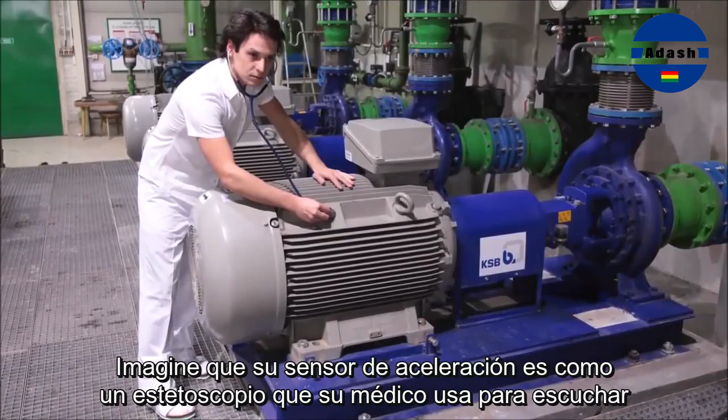So what is an acceleration sensor and how does it work? Imagine that your acceleration sensor is like a stethoscope which your doctor uses to listen to your heart. It is basically able to monitor the vibration signal from the machine and show you the values of these vibrations on your vibration meter or analyzer.

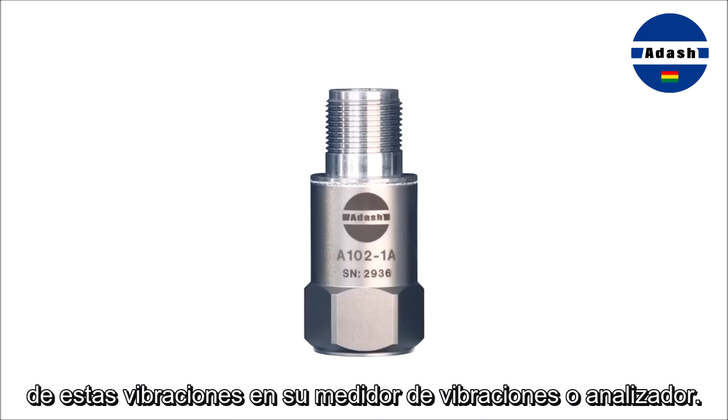The most commonly used acceleration sensor in industry is a piezoelectric acceleration sensor. It is an electronic device which, in a very simple way, looks like this inside, and like this in reality.

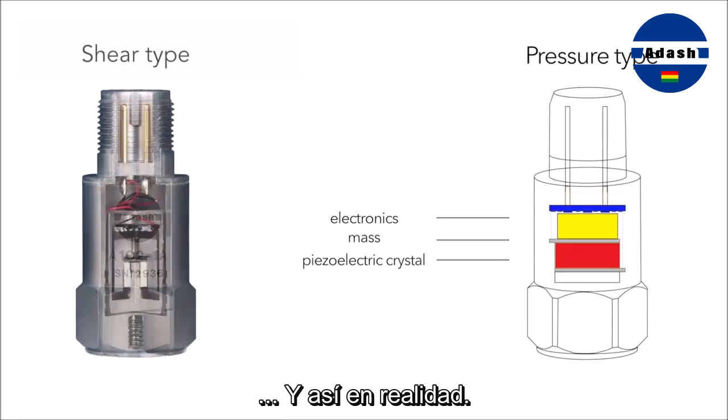A piezoelectric crystal generates an electric charge when it is deformed, meaning compressed or stretched. To ensure deformation of the piezoelectric crystal, you can see that there is some preloaded mass on it. The electric charge is transferred into the electronics of the sensor, where the electric charge is converted to voltage.

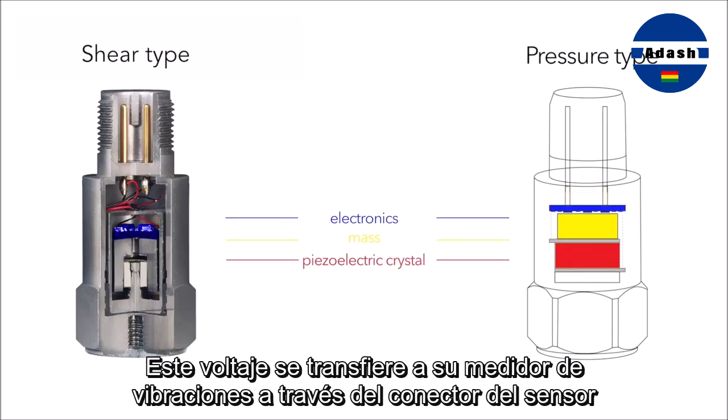This voltage is then transferred into your vibration meter through the sensor connector and cable. In other words, the sensor is shaking on the running machine. The preloaded mass is deforming the piezoelectric crystal, and this generates a voltage signal on the output of the sensor.

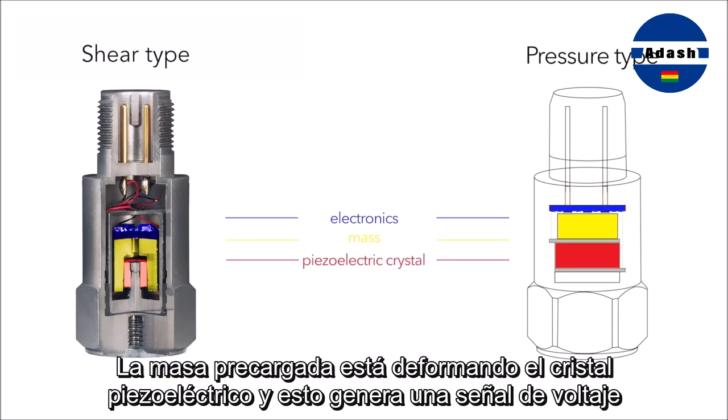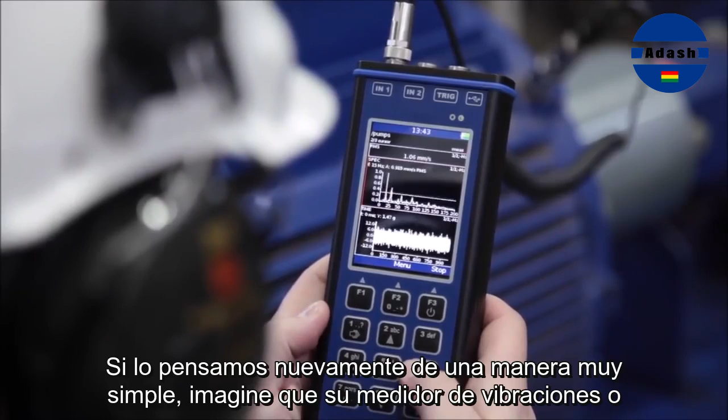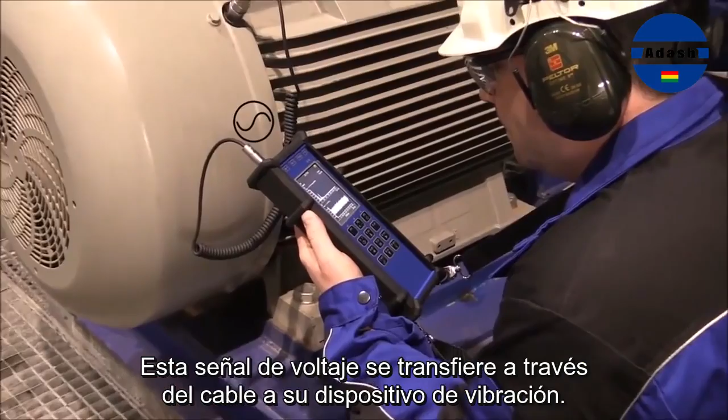A vibration meter or analyzer is an electronic device which is able to process vibration signals. If we think about it again in a very simple way, imagine that your vibration meter or analyzer is a voltmeter. The sensor is generating a voltage signal while it is shaking on the machine. This voltage signal is transferred through the cable to your vibration device.

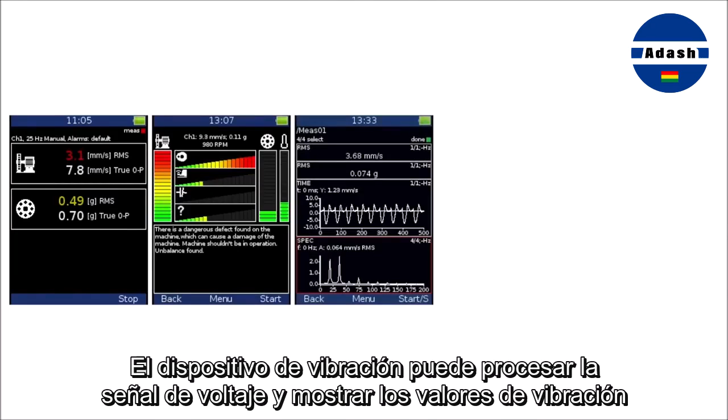But your vibration device will not show you volts. It is smarter than that voltmeter. The vibration device is able to process the voltage signal and display vibration values such as acceleration and velocity. We will describe vibration values in our next video.

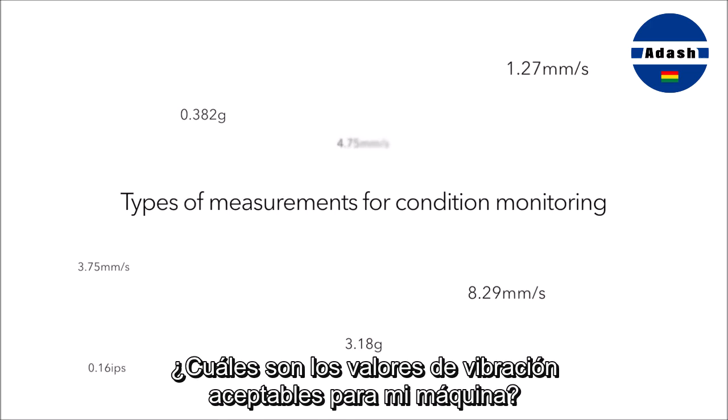The most common question about measurements is, what should I start to measure and what do these numbers tell me? Is it a good number or a bad number? What are acceptable vibration values for my machine? What are the limit vibration values which my machine should not exceed?

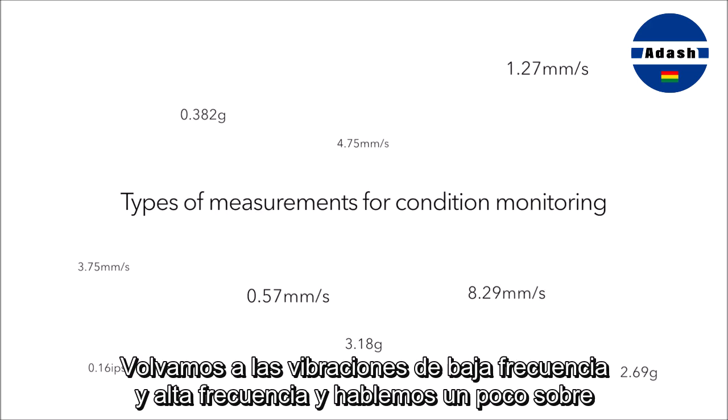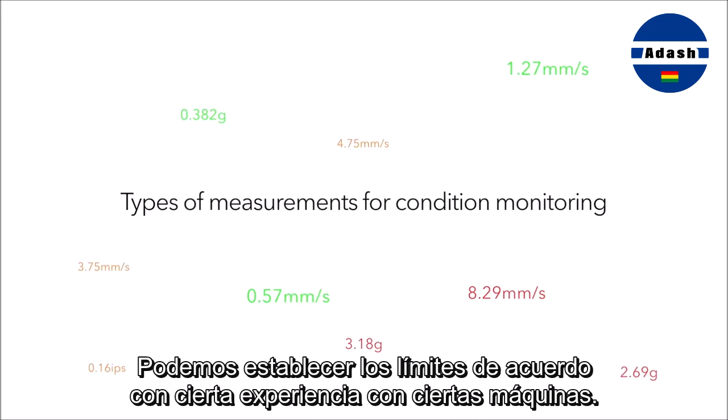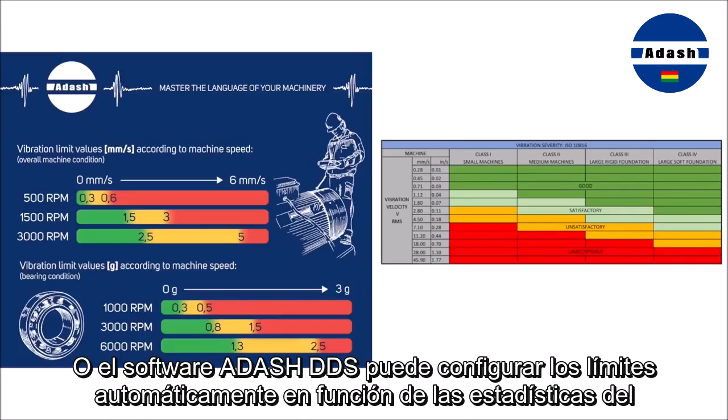Let's go back to low frequency and high frequency vibrations and talk a bit about vibration limits. There are some limit vibration values which can be considered as values indicating a worsening machine condition. We can set up the limits according to some experience with certain machines. There are also, for example, Adash and ISO 10816 standards for those limit values. Or the Adash DDS software can set up the limits automatically based on statistics from the previous measurements.

All mechanical faults which are related to the speed of the machine, such as unbalance, misalignment and mechanical looseness, are considered to be low-frequency vibrations. These vibrations are measured as velocity in millimeters per second or inches per second.

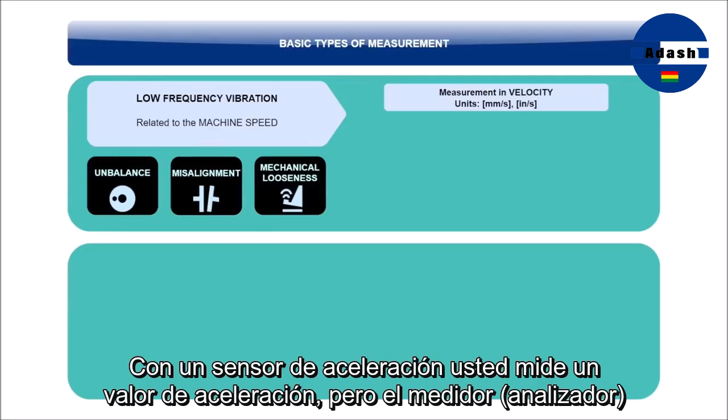Maybe you are asking now how you can measure velocity with an acceleration sensor. With an acceleration sensor, you can measure an acceleration value, but the meter, the analyzer, can convert the value to the velocity value. The most common frequency range of this measurement is 10 to 1000 Hz.

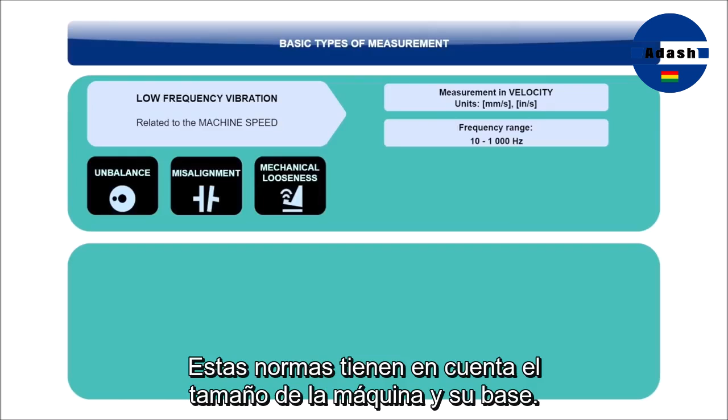This frequency range is also applied on ISO 10816 standards. These standards take into account the size of the machine and its foundation. Adash has defined vibration limit values which are related to the speed of the machine, not to the size of the machine. The frequency of 10 to 1000 Hz is also applied.

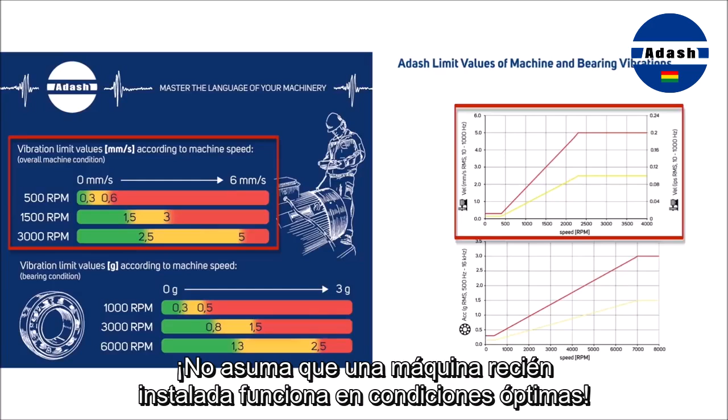Do not assume that a newly installed machine runs under its optimal condition. What if it was badly installed? It could be misaligned or unbalanced right from the beginning, as we described in Vibration Diagnostics for Beginners, Part 1.

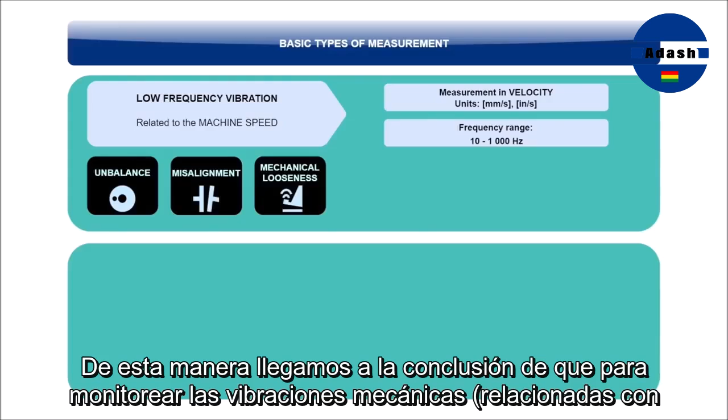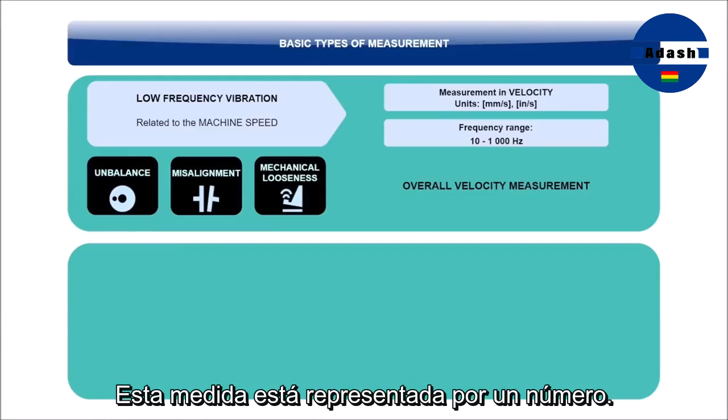This way, we came to the conclusion that to monitor mechanical vibrations related to the shaft speed of the machine, we will use the measurement of overall velocity in millimeters per second, or IPS, in the range of 10 to 1000 Hz. This measurement is represented by one number. Using the DDS software, we can trend this value in time and see its development.

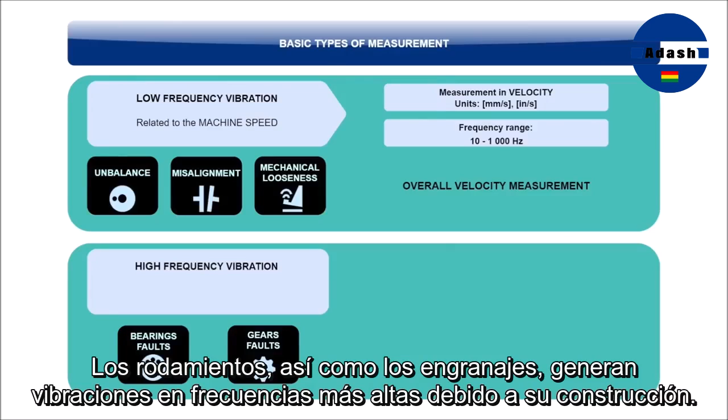A specific part of the machine which we want to monitor is a bearing. Bearings, as well as gears, generate vibrations on higher frequencies due to their construction, their natural frequency. These vibrations are measured as acceleration in a G value. The frequency range of this measurement may vary a lot, and you should find out what would be the best for your particular bearing. But let's keep it simple and define your measurement of acceleration in the range of 500 to 16,000 Hz.

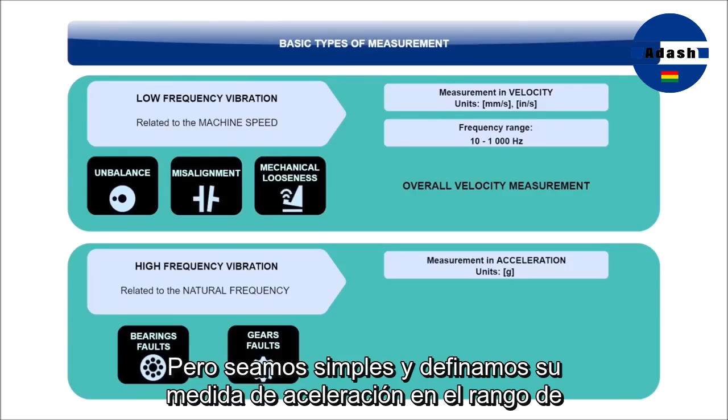ADASH has defined bearing vibration limits related to the speed of the machine again. The mentioned frequency range of 500 to 16,000 Hz has been applied.

Even if we have ADASH bearing vibration limit values, they are just informational. These limit values were created on the basis of more than 30 years of experience of ADASH field engineers.

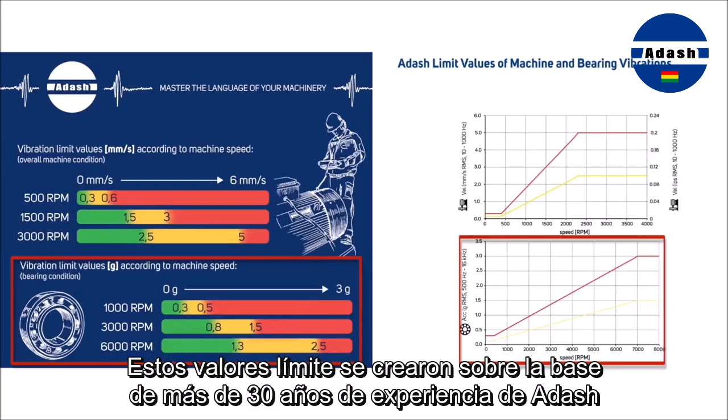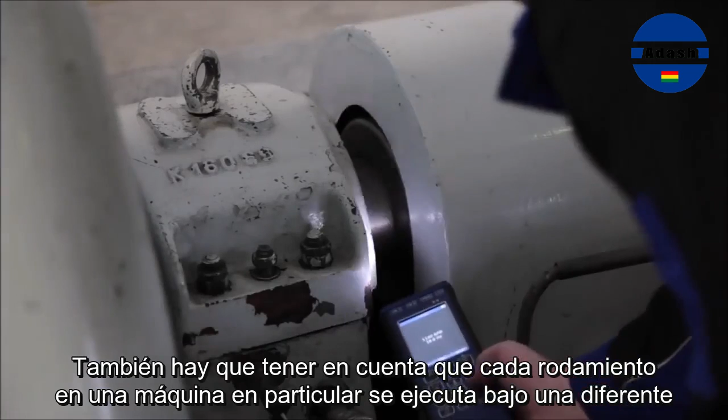Why do general bearing vibration limits not exist? As you can imagine, there are many thousands of bearing types on the market. Therefore, you cannot define general vibration limits. Also, you have to consider that each bearing on a particular machine runs under a different speed and a different load. Another aspect is how the bearing was installed in the machine.

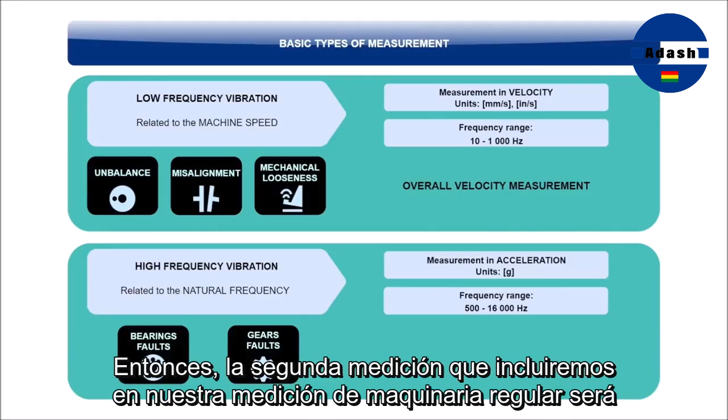So, the second measurement, which we will include in our regular machinery measurement, will be overall acceleration in G, in the range of 500 to 16,000 Hz. It is represented by one number. Again, using DDS software, we can trend this value in time and see its development.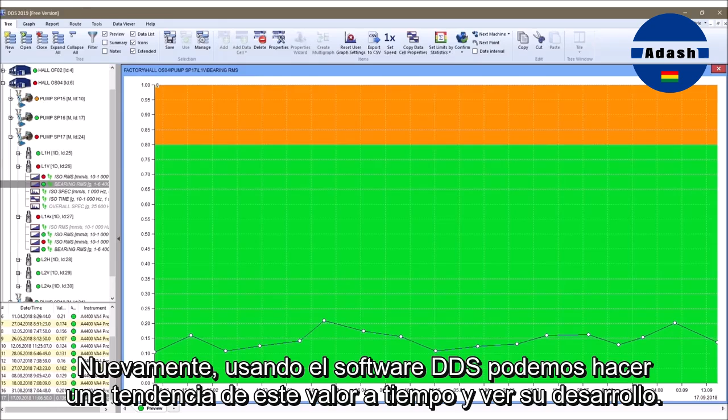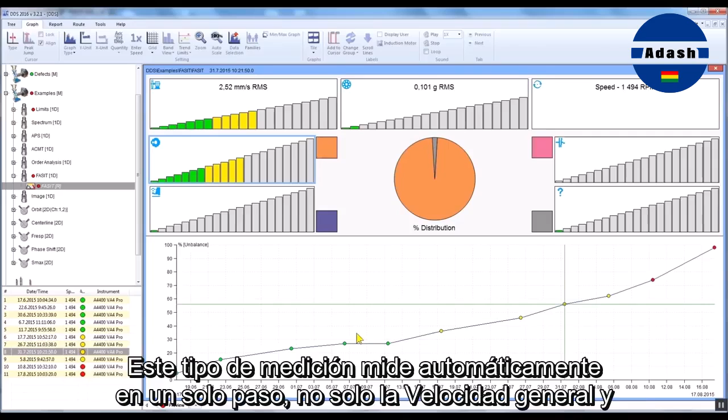The ADASH FASIT feature offers a very user-friendly approach to basic measurements. This type of measurement automatically measures in one step not only overall velocity and overall acceleration, but also the severity of individual machine faults, such as unbalance, misalignment, mechanical looseness, and bearing faults. All values are based on ADASH limits.

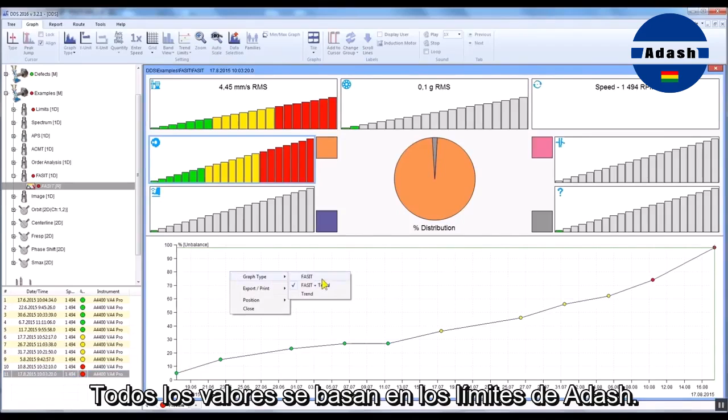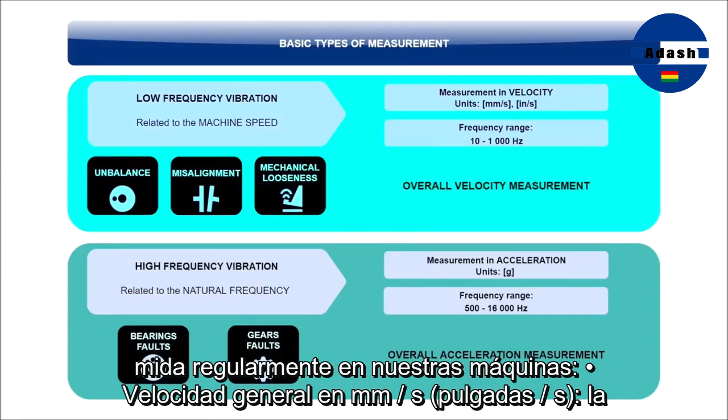So, for quick summarization, there are two important values which we should measure regularly on our machines. Overall velocity in millimeters per second, or inches per second, the lower frequency range, which indicates the general machine condition. Overall acceleration in G, the higher frequency range, which indicates the bearing condition.

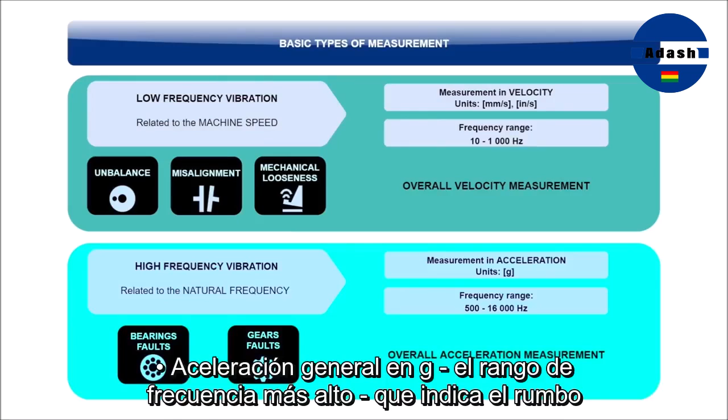Maybe you're asking why we use different units, velocity and acceleration, for those measurements. Put simply, the acceleration is more sensitive to high-frequency vibrations, and the velocity is more sensitive to the lower frequency range. So it has become common to use those two units as they are the most effective for vibration diagnostics.

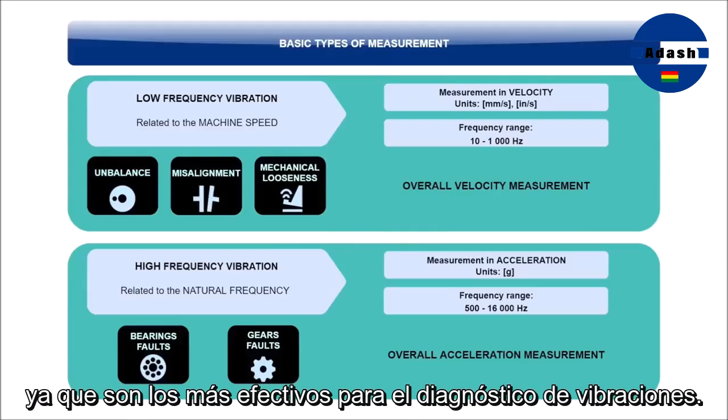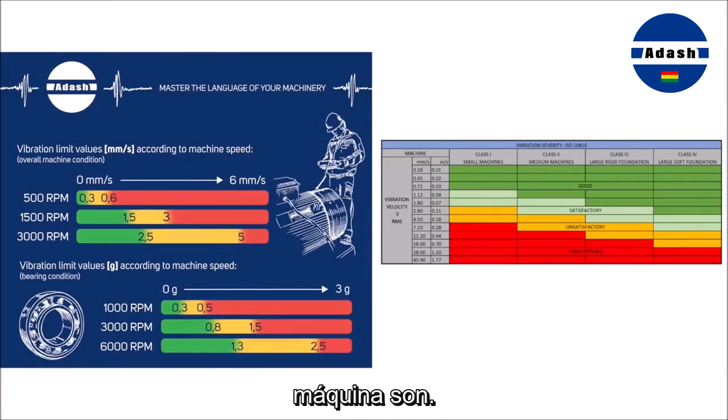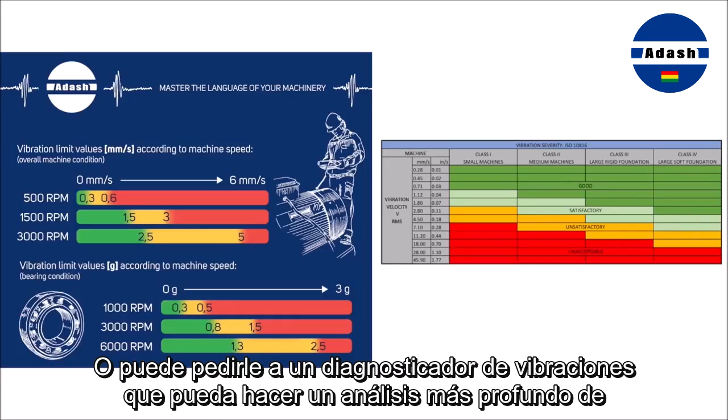Whether we use ISO or ADASH vibration limit values, they are just informational. You should always try to find out what the vibration limit values for your particular machine are. In other words, to find out what the optimal operational condition of your machine is. You can do that by measuring and comparing more machines of the same type, running at the same speed and under the same load, or you can ask a vibration diagnostician who should be able to make a deeper analysis of the machine and tell you if the machine is running under its optimal condition.